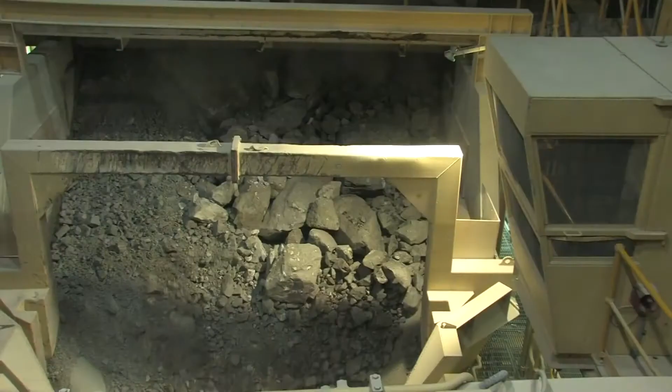Northparkes Mine is located 27 kilometres from the town of Parkes in central New South Wales. The underground copper and gold mine processes ore to high-grade copper concentrate on site before being transported south to Port Kembla and shipped to international customers.

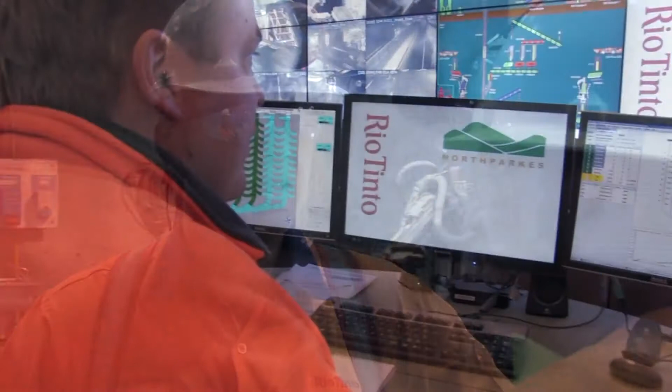Sandvik and Northparkes Mine have developed a successful relationship over many years working together, currently working toward 100% automation of the mine, planning for additional automation and future projects.

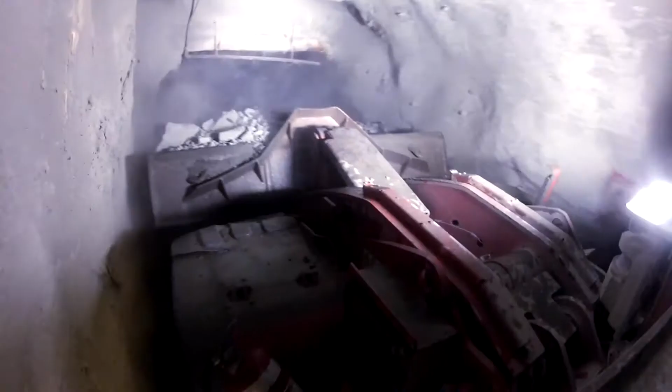Sandvik AutoMine Loading is a comprehensive solution for improving safety and efficiencies of underground mining operations. It is a flexible system which can be adapted to the unique working environment of individual operations.

At the beginning of the project, we investigated what automation packages were available to us, and Sandvik's AutoMine was the only package that met all our needs and was the only true mass mining production system. It's got the loader automation side, the traffic management and the production management side, and the interface to our SCADA system. That's come together and is now working well and seamlessly.

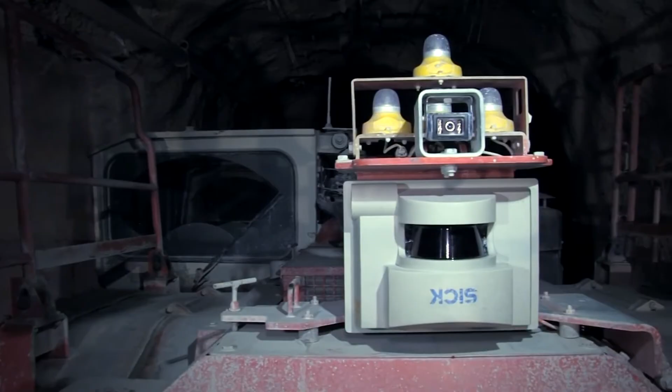Working in collaboration with individual customers to achieve improvements in safety, productivity and peace of mind. The key business driver for us to automate the loader fleet was to increase the utilisation, and we do that by being able to operate across shift change and through blast clearance times. It means we get more tonnes out of the mine, and more tonnes means more copper produced.

The ultimate goal for us is to remove the operator from the hazardous working environment, be able to maintain the machinery at a lower cost and also increase production and machine utilisation. Key drivers and benefits of Sandvik AutoMine include safety and health, improved working conditions, production management, improved utilisation, and lower operating costs.

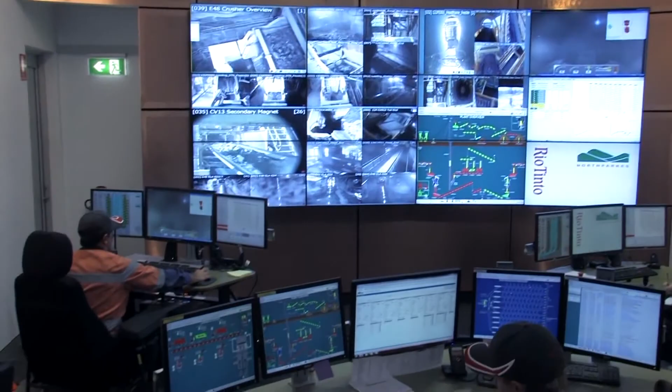A key benefit of Sandvik's AutoMine is the increased safety and improved working conditions achieved for operators. We consider the highest level of international safety standards from the concept phase, design phase, testing and commissioning phase through the whole life cycle of the system.

We remove our operators from a hazardous environment, which involves exposure to vibration, dust, noise, and we bring them into a controlled environment in the control room, which they really enjoy. Sandvik's AutoMine removes operators completely from the potential hazards of underground mining.

The new system does a lot of the thinking for you, and it's a lot easier from up here. Now we can come straight in here, there's no travel time, everything's set up for us. We just come in, sit down and get to work within a few minutes really.

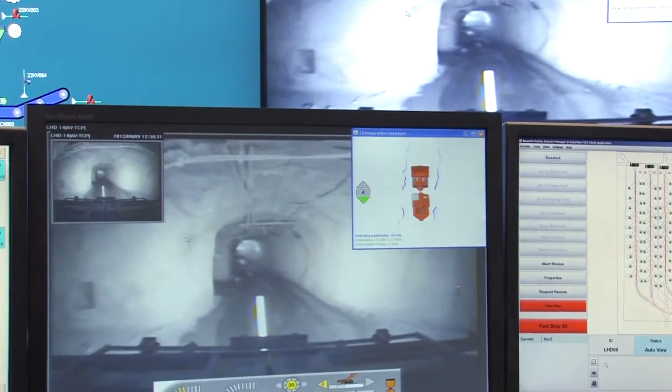Sandvik AutoMine Loading achieves productivity improvements. This includes the ability for single underground technicians to operate multiple loaders simultaneously.

All we have to do is bog the draw point, we'll send it on its way, it'll get to the ROM and tip by itself automatically, and it will turn up at the next draw point that's needed.

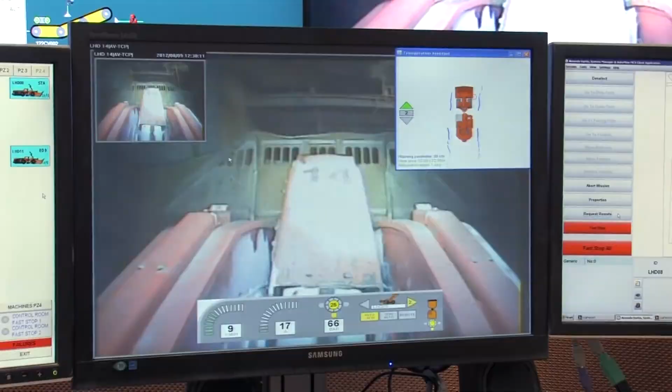Increased productivity is also achieved through efficient use of machinery. Our materials handling system doesn't see the big variation in levels when there's no one here, and the crews don't need to rush down and get into it hard to fill the bins. We can plan and be a lot more strategic about how we draw from the level.

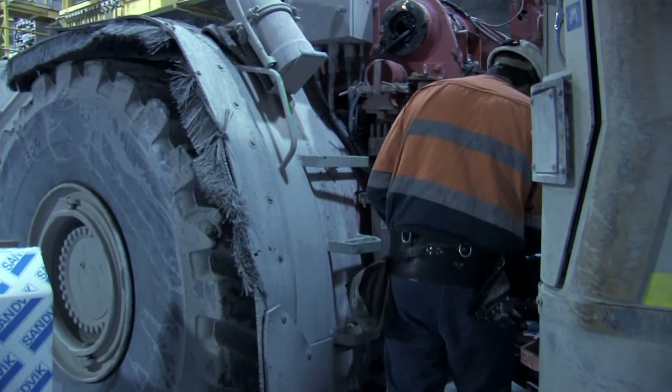Sandvik work diligently to ensure the ongoing support of its systems and machinery through a commitment to local, regional, national and international support structures. With our service contract, we maintain all the mobile equipment to do with the production fleet, as well as now the automation infrastructure and the onboard automation equipment on the machine. We work around the clock, 24 hours a day, 7 days a week, 365 days a year.

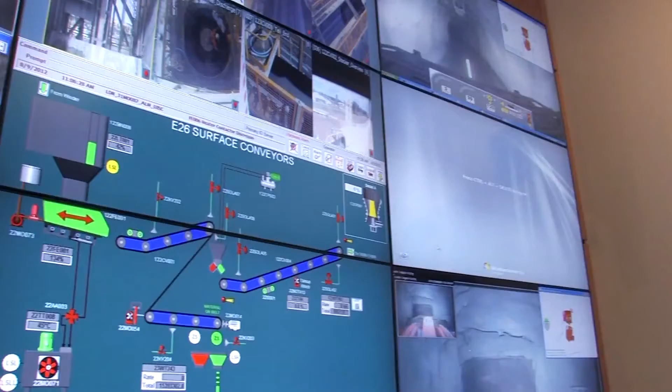The success of Sandvik AutoMine Loading at Northparkes Mine is the beginning of much broader implementation for future projects. We're looking to a 5-fold increase in production from Northparkes mines. We're going deeper, it's lower grade, we need to be smarter about the way we do it. So for us, automation is a key enabler for us to be able to get those tonnes out of the mine at a lower unit cost.

For the rest of Rio Tinto, as we transition from open cut operations to large underground block caving operations, they look at Northparkes and the performance we have here to see what they can adapt to these larger block caves in areas like Mongolia and in the United States.

One of the great advantages is we've had Sandvik on site for a long time. They know our systems, and certainly the regional guys, the Aussie guys, have been absolutely fantastic. They're as motivated about this technology as we are. So as we've come up to challenges, it's been a combined effort to get past them and make the system as good as it is.

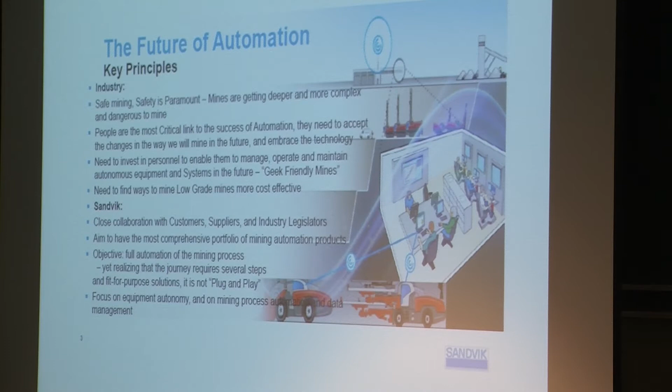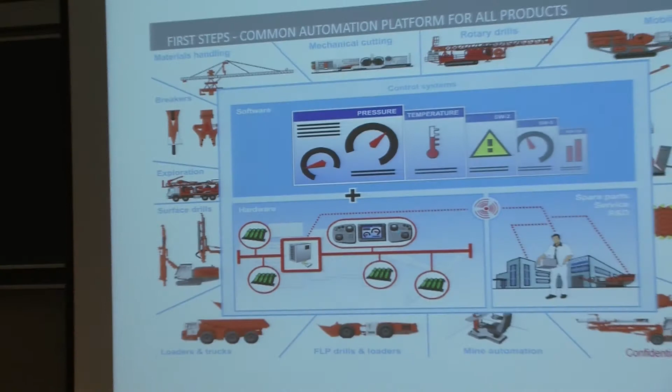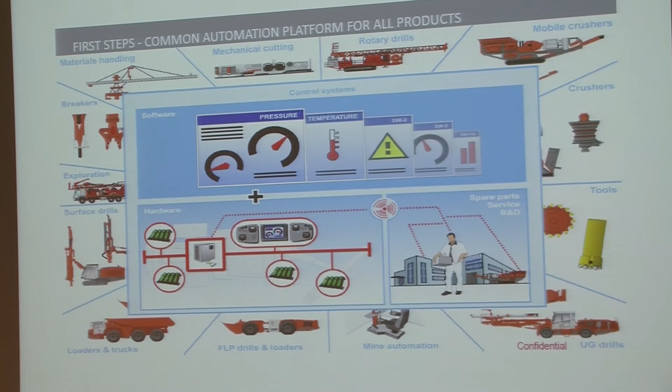What this slide basically says is that the first approach for Sandvik was that we understood that with the various products we've got out there and the various suppliers we were dealing with in the past, the only way we could have a common integration of automation is to have the same platform across all the products. So in the last 2 years, what Sandvik has done is look at the products out in the market, and basically establish a common automation communication platform system.

So that we can use the same technologies for automation that we use underground and also apply that in some areas to surface, and vice versa where possible. So that is basically the first step, the integration of the entire product range.

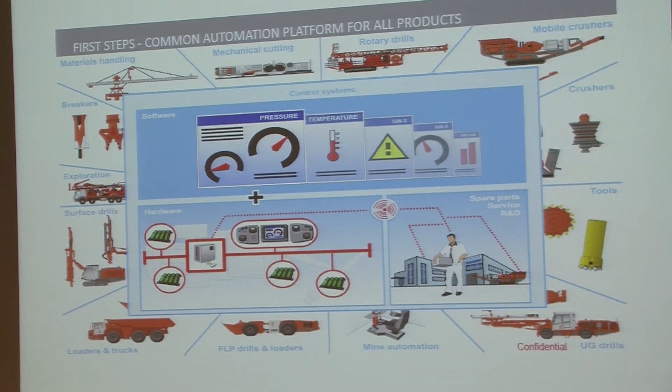Slide number 5, which talks about the future, is an indication of the fact that we've now got what we call the SICA platform, the Sandvik Integrated Control System platform. It's now been implemented across our product range, and with that we are currently able to do full equipment monitoring, remote control, fleet management, process management, and in the very near future also proximity detection. So that is the focus for us in the near future.

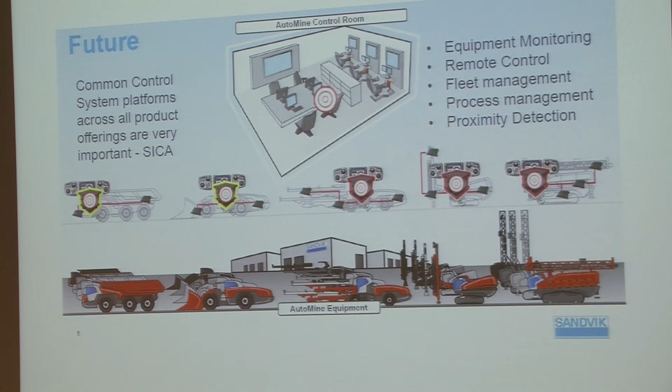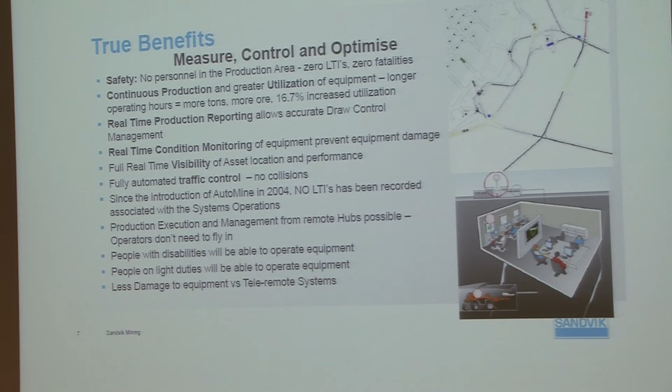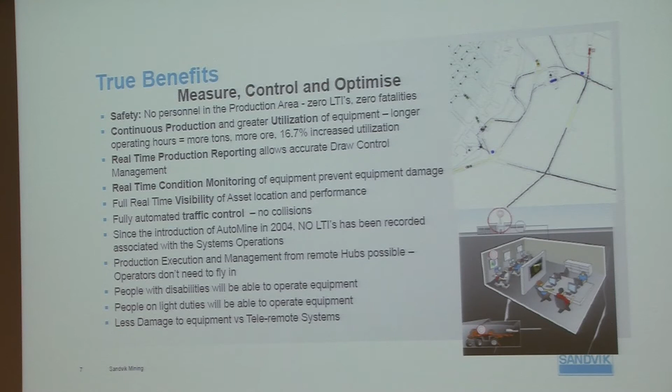There's always a lot of talk about the benefits of automation, and that's what slide 7 is highlighting - the true benefits of automation cannot be ignored. First and foremost is safety. If you have no personnel around the operating equipment, you obviously have a great improvement in the safety statistics. We've implemented our first systems in 2004 overseas in South America and South Africa, and since that time we've had zero LTIs in those areas. So the biggest benefit of automation is safety.

Continuous production - the higher utilization you have, the longer operating hours, the more tons you can produce. Real-time production reporting is about data, and at the end of the day, that data is also very valuable to your production and maintenance people. And then also full real-time visibility of your assets and resources, so management can now see where the equipment is, what it's doing in real time, and whether it's performing as planned. So the visibility aspect is there as well.

And then also fully automated traffic control, where you've got more than one piece of equipment in the same area. Some other benefits are that people with disabilities are now able to work on mine sites, which previously was not the case in those particular roles. People that are injured and supposed to be on light duties can also now operate equipment because they're working from a control room environment. The last point is less damage to equipment versus tele-remote systems - autonomous systems let the equipment perform within certain design parameters, and that's a major benefit over manual operations as well as tele-remote operations.

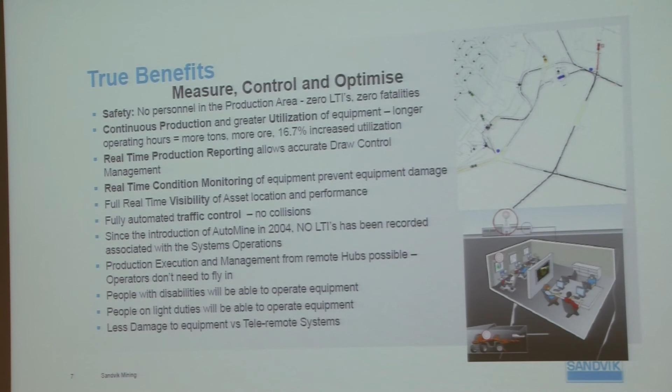The video you just saw on slide number 8 is about the case study of Northparkes Mine in New South Wales. That's a project that was initiated with Sandvik in 2007. At the moment we've got 6 autonomous loaders there, 4 production zones, and 24/7 operation. What forms part of the system is real-time production recording and reporting, updated on a 24-hour basis every day, and also real-time condition monitoring and reporting to assist maintenance crews in looking at the condition of the equipment operating underground.

Automation also allows for production over shift change on that mine, so they don't have to clear the operators or machines for blasting clearance, and there's also no travel time for operators underground. So it's all on a hot seat change basis that is currently performing.

The system also fully complies with the supplier obligations under the AS 61508 standards for functional safety. We've done a major effort during the design of the system to make sure we have all the parties involved from the mine as well as the legislators in New South Wales, to ensure that when we implement the system it will be acceptable and can be signed off according to the standards.